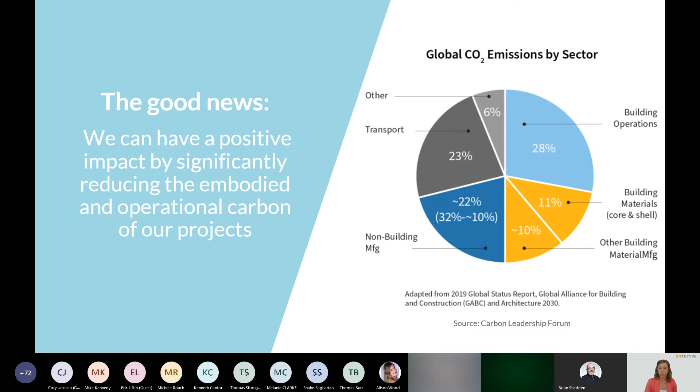In the graph on the right, you can see buildings account for almost 40% of global greenhouse gases, 28% of which are operational, accounting for carbon emissions associated with building energy consumption, and 11% are embodied, measured as global warming potential, which accounts for carbon emissions associated with the manufacture, transport, and installation of construction materials. However, the portion associated with operational carbon is expected to significantly decrease in coming years as buildings continue to have better operational performance, which means embodied carbon is going to start to occupy a much bigger piece of that pie.

As designers and professionals of the built environment, we want to know what we can and should be doing about this. The World Green Building Council's Bringing Embodied Carbon Upfront publication provides some fantastic guidance on required actions for all stakeholders involved. As you can see in the graph, to have the most impact on reducing carbon, of course the best option would be to build nothing and instead look for suitable alternatives. But if building is required, the next best would be to explore options for reusing existing structures and materials wherever possible. Then when designing, optimize as much as possible to reduce new materials and use low carbon materials — and that's where we're going to be focusing today.

One design approach for reducing embodied carbon would be through optimized material selection, with some examples there on the left. Another option would be to make more informed design decisions that result in reducing material quantities. With all of these things in mind, and knowing that the biggest opportunities for carbon reductions take place in the earliest stages of design, we wanted to develop a tool that would help us quickly and efficiently quantify those materials in concept design before a Revit model is even started.

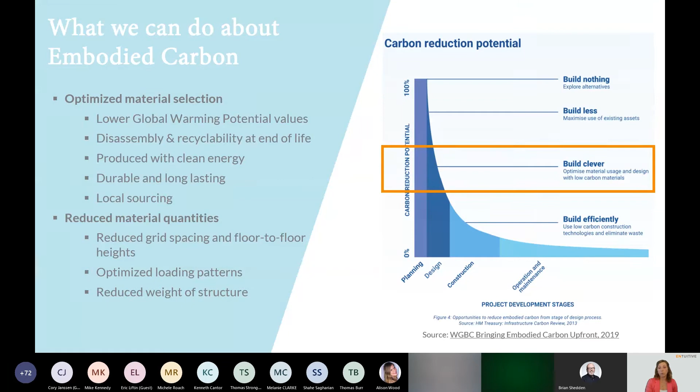With that information, we could then apply the global warming potential, which is the embodied carbon, of those materials and arrive at an estimated embodied carbon for the building or structure, from which we can then make informed design decisions going forward. Enter Entuitive's CARBEN Tool. This is a parametric tool that uses Rhino and Grasshopper, and the tool was developed around 3 key goals.

So first, it has to be easy to use for collaboration in client and design team meetings, and it has to generate results quickly. It has to calculate material quantities and the embodied carbon of both the structure and the building envelope. And finally, it has to complete concept level design checks to ensure that the generated structure is valid. And we can use this tool to analyze concrete, steel, or timber structures.

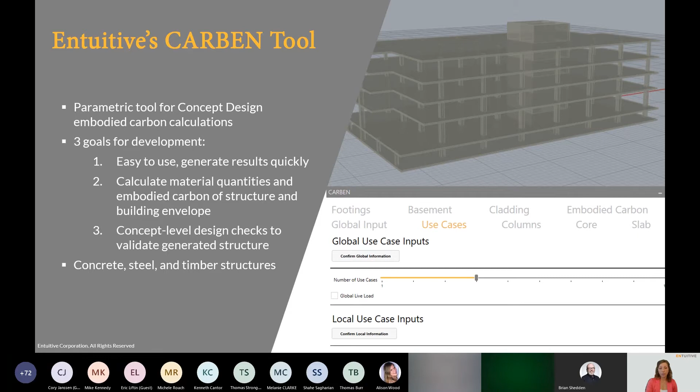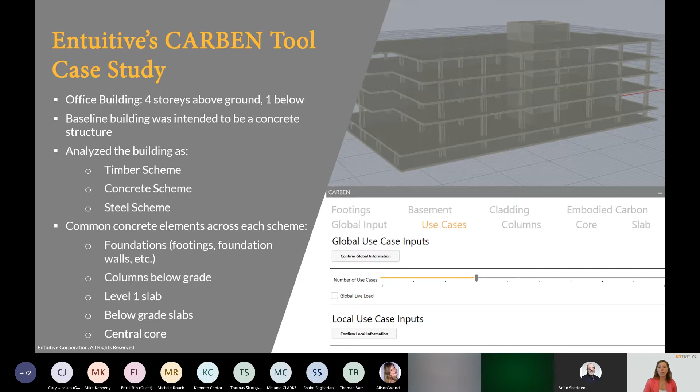So I'm going to take you through a quick case study of a 4-story commercial building to show you the functionality of the tool. This building was originally intended to be a concrete structure, which we're considering as the baseline. We wanted to evaluate the building from a timber and steel perspective as well. Each scheme does have some common concrete elements, such as foundations, columns below grade, level 1 slab, and below grade slabs, and the central core.

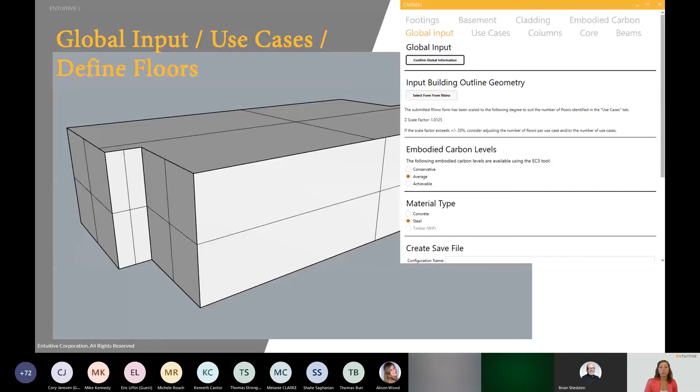So to start, we create or import an architectural form from Rhino and define the structural material type - concrete, steel, or timber. Then we can select a set of unique use cases to define the loading, the floor height, and the number of floors per use case.

Next, we define the column shape, the spacing, and the layout, and the column size or strength of the material is automatically designed in the program.

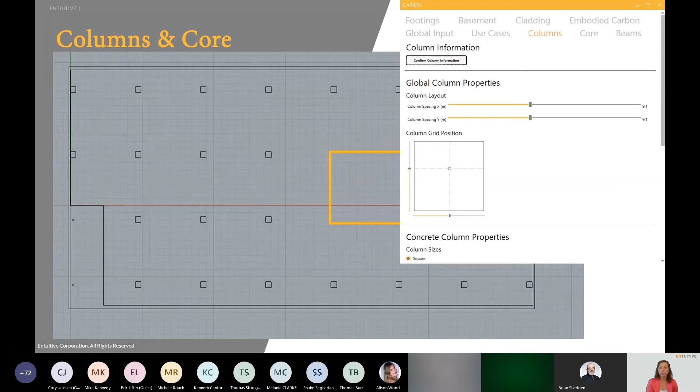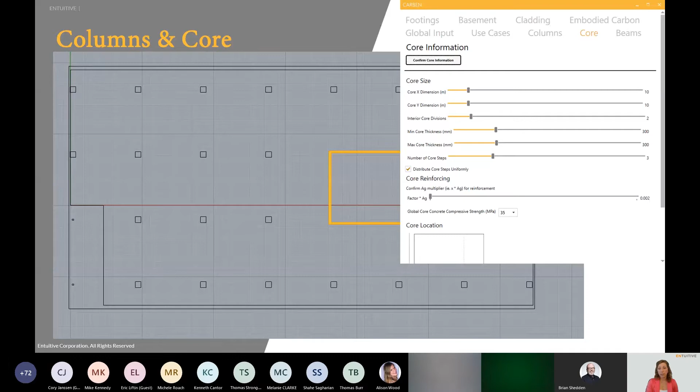We also define and place a central rectangular core, which removes columns as required. Other partitions can also be added, and all the wall thicknesses are defined.

Next, we define the beam parameters and spacing and define the deck parameters, and the framing is all automatically generated and the beams are all designed for strength.

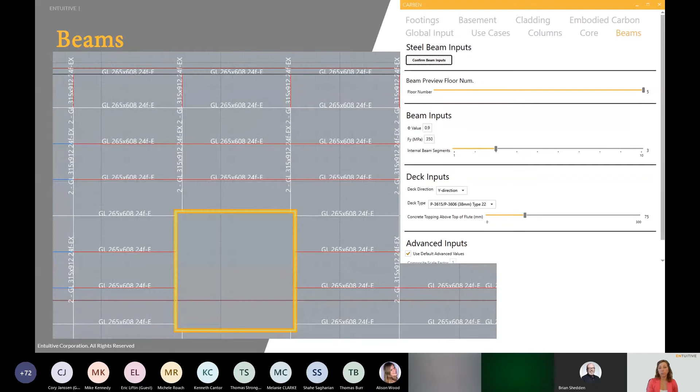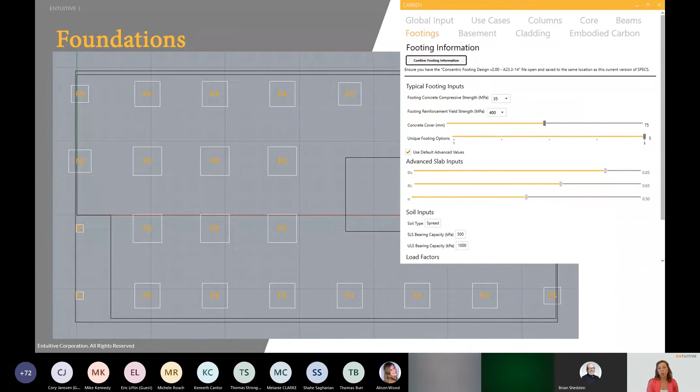And finally, for structure, we define the design parameters for the foundations. So currently we use a simple pad footing design, but we're in the works of adding other foundation options, including piles and raft slabs. Next, we add in the cladding options.

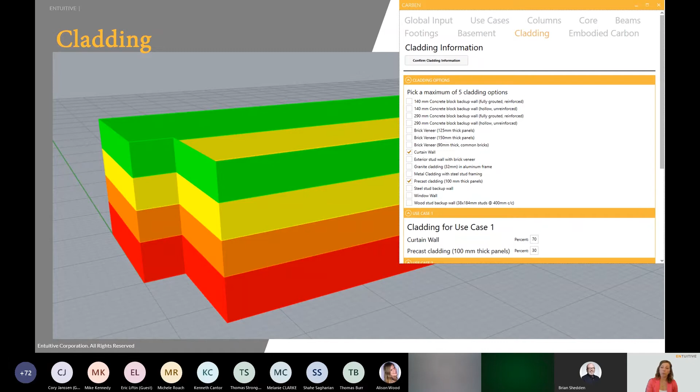These options can be defined per use case, and we can define the percentage of each cladding type per use case. Each cladding type will affect the loading and then the total embodied carbon.

Finally, we arrive at our embodied carbon estimates. The quantities of each material are tallied and the global warming potential of each material is applied. These results can be broken down by material type, element type, use case, or floor number. The embodied carbon values will update when the various design parameters are adjusted.

So for this case study, we compared the embodied carbon of each scheme. One commonality across all three schemes was that the slabs, unsurprisingly, had the most carbon. Remember, there was concrete that was common across all 3 schemes, and there was concrete in each of those schemes.

From that, we can then make some design decisions to reduce that amount of concrete where possible. We can also look for ways to reduce the embodied carbon of the concrete by increasing SCMs, using Portland limestone cement, or other innovating technologies to reduce cement content.

These graphs show the embodied carbon as a percentage of the total for each scheme. When compared to baseline, the timber scheme had a 31% reduction in embodied carbon, and the steel scheme had a 24% reduction.

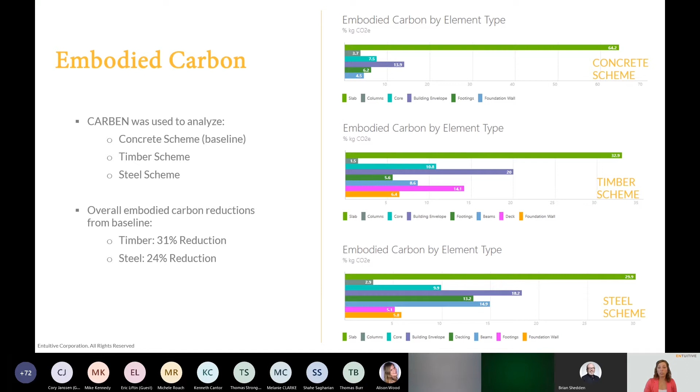So really the biggest benefit to using this tool is that it's really quick and agile, and it allows us to quantify multiple concept designs relatively quickly since all element sizing is automated, which is different from current tools that are out there where the user actually needs to determine the structural sizes.

This tool is constantly being improved and expanded, and some of our future plans include creating a hybrid superstructure option to find an optimal balance between timber, steel, and concrete elements. We want to continue adding to our EPD database of materials, and we are expanding the concrete scheme option since right now it just looks at flat plate. We also want to build more foundation options in addition to pad footings to include piles, caissons, raft slabs.

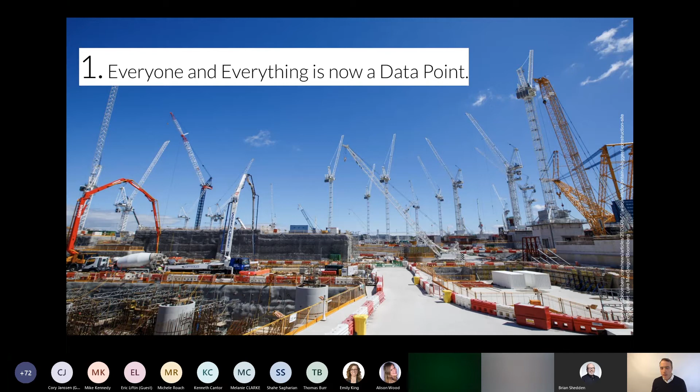What we have to understand is that every single thing on a project can be measured, tracked, and understood. An important trend is that the cost of this data acquisition over time is coming down significantly, and I think we're just starting to see that.

As everyone's moved from BlackBerries to cell phones, moreover now we're digitizing our projects at the early stages in a BIM environment and then connecting that to our systems.

A quick example: this is a Leica P50. These retail for about $150,000. You need $20,000 in software, a $10,000 computer, and an $80,000 paid individual to actually operate the system.

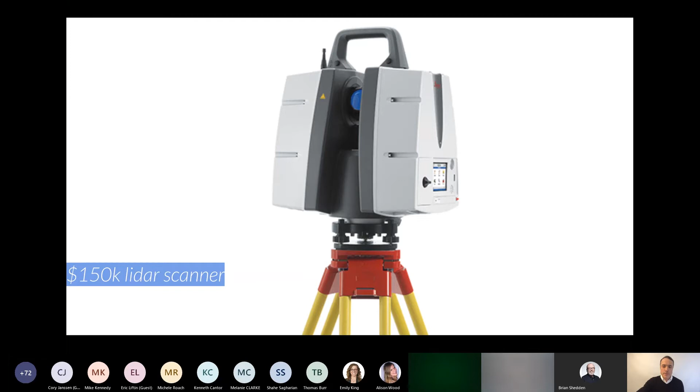This year Apple's going to release an iPhone with a LiDAR scanner built into it. So we're seeing major steps in simplifying how we're collecting data and making it easier to collect.

This is a UAV that Amazon's releasing this year for $250 — you can have a security camera that flies around your home. It's easy to see how these things can bridge to an active construction site and provide a lot of value for data collection.

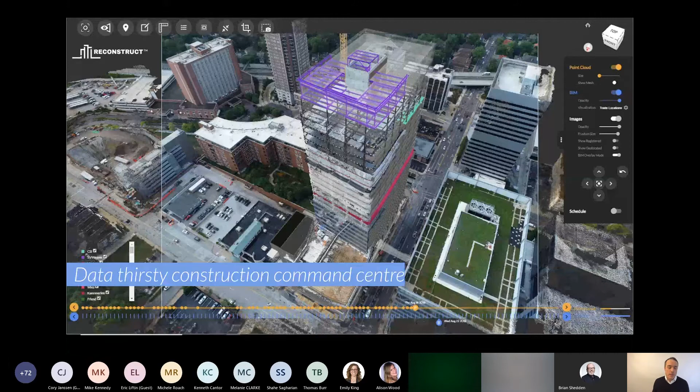And then there's a whole class of software technologies that integrate all this information into one place, giving the construction manager, or whoever's in charge of that job, total insight into all the real-time activities and data flowing on their project. This one's called Reconstruct.

The second major point I want to make is that your software knows you better than you know yourself, in that it's collecting data about everything you do, and it can actually process that data and give you recommendations better than you can do in a manual way.

Over time that's actually getting worse, as the people with these skills and experience are retiring out of the workforce, and our projects are getting more and more complicated.

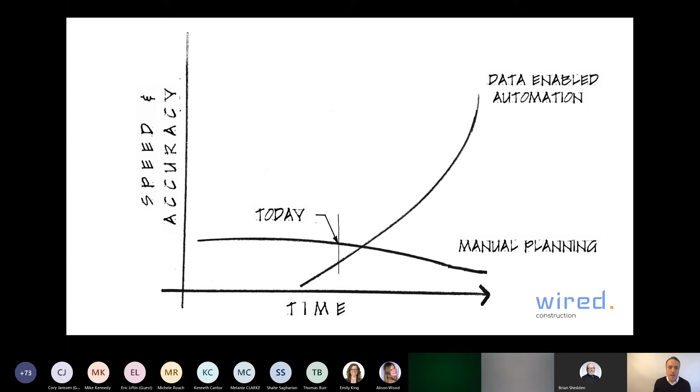I think what we're going to see very quickly is that data-enabled automation — the tools, the AI, and all these platforms — are going to accelerate way beyond what we're currently capable of using with our manual processes.

As an example, looking at the planning fallacy: this idea that we can think about a construction project as a cascade of activities. The reality of that is significantly different.

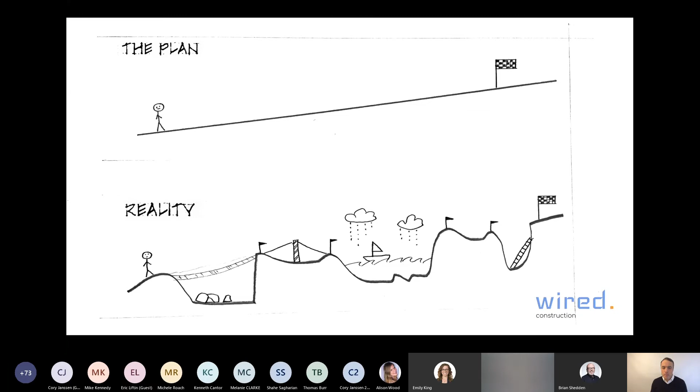On a project, you've got many moving parts, many variable factors, and all we can really do is project the best path forward, and then bob and weave as we go. So the big difference here is that the software, because it has access to our data in real time, can actually provide better recommendations than what we can develop for ourselves.

Just a few examples: there's a whole class of estimating tools that connect with our models. Now that we're generating 3D models of the building we're going to build, we can compare that against our historical productivity rates and unit costs, and the system will spit out a pretty decent estimate almost instantly. The challenge is that, as a GC, you're using someone else's platform and formula, and potentially someone else's database of unit costs.

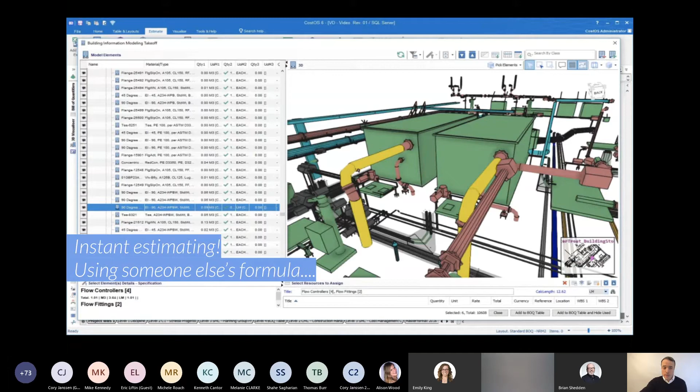The same thing is happening in design, where we see generative design now being used on a regular basis to solve for design. The challenge again is that you can set the parameters, but you're using someone else's platform and someone else's design algorithm. So it's really changing the nature of what you provide as a service.

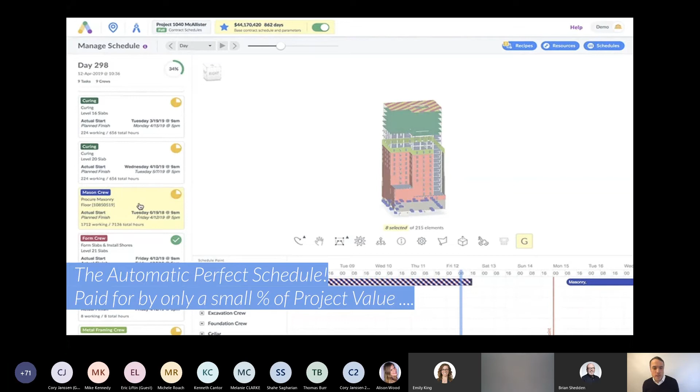We're seeing that generative design concept now being applied to scheduling, where with a 3D model, your productivity rates, and the recipes of how the sequence of events needs to occur on a job, you can pay a small percentage of your project value and have an AI generate millions of different scheduling scenarios, allowing you to pick the most optimal sequence of events for your project.

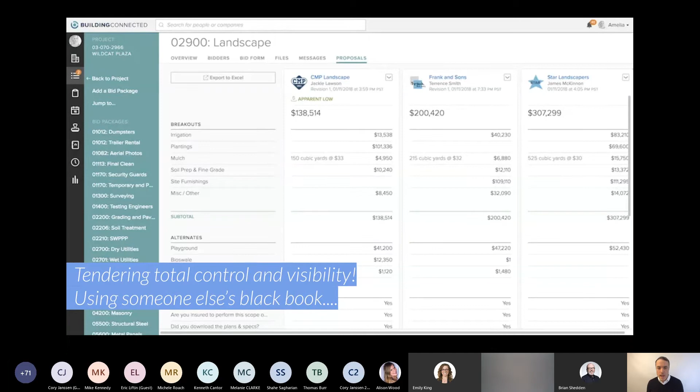Some examples of this: Autodesk purchased Building Connected a couple of years ago for about $600 million, somewhere in that range—probably have that wrong, but a significant amount of money. It's a fantastic tool for tendering. A general contractor can now tender with total control and visibility, managing all those transactional discussions with their supply chain. Unfortunately, you're doing that on someone else's platform, potentially with someone else's black book. So you could see how that can lead to Uberization.

The beauty of using systems like this is that your historical information is cataloged and organized for your use. But again, if you're storing information in the cloud on someone else's product, you're storing your data on someone else's computer—and supply chain management system. Jovix is an example, a huge platform.

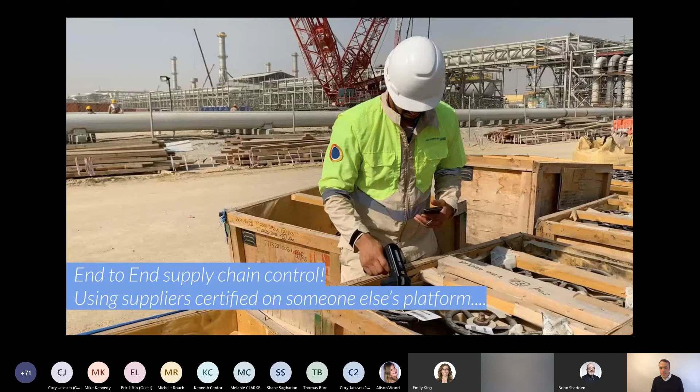What they do—you invite them into your project—they'll go out and certify your suppliers. They'll set up Wi-Fi beacons all over the factory and put an RFID tag on every single element being fabricated. Now you have total visibility in your supply chain from fabrication through delivery onto the job site, and all the points where you need to check for quality. Unfortunately, again, you're doing this on someone else's platform, and you're certifying them on that platform.

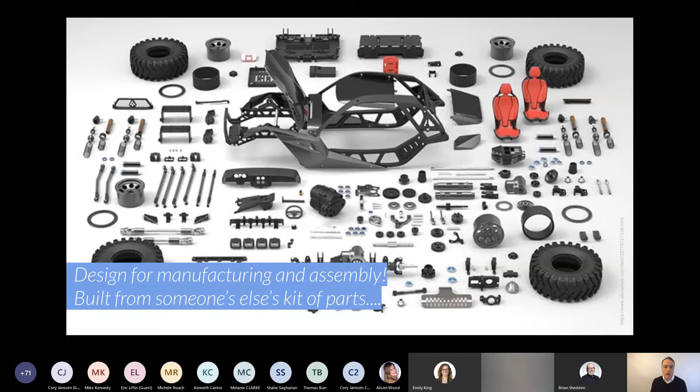Every time you give away some of this responsibility, you're giving away a bit of the service you used to provide. This is an example from Alibaba where you can order a kit of parts and assemble a vehicle. This is very applicable to our world now, where we're designing for manufacturing and assembly—we want to reform our supply chain, buying elements that assemble on the job site, which greatly simplifies design, procurement, and construction. However, you're creating an environment where you're building using someone else's kit of parts or their intellectual property. So those are my three major points.

So it's not all murky and dark. I do think that general contractors definitely have a place, and they're going to continue to have a place. But I think there's a real need to think about the technology you're introducing into your technology stack for your business, and think about the data that you're giving away.

And as you procure those systems, you need to think carefully about those relationships that you're developing, making sure that you have interoperability, making sure that you can extract the data, and making sure that the culture that you're creating within your business as you digitize your work and inject these systems into your business, you need to be able to be prepared to move and turn on a dime and replace those systems with other systems as required in your technology stack. So that's my quick six minutes, but I'm looking forward to the discussion.

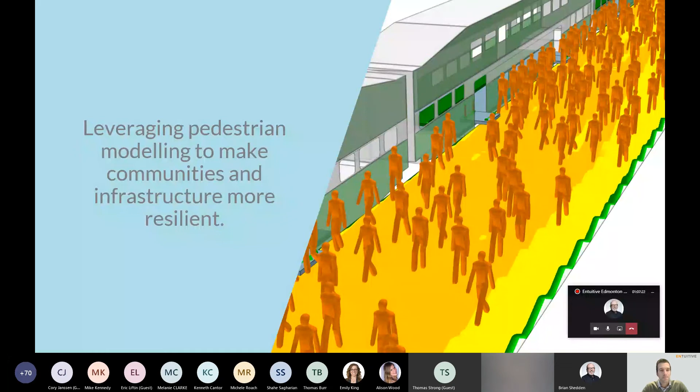So what is pedestrian modeling? It's the analysis of how people move within our built environment, and we do this to quantify movement patterns, travel times, or areas of crowding and queuing. The animation you see on the right is one of the large transit projects we worked on, and this in many ways is one of the typical uses for pedestrian modeling. It's any type of building or infrastructure with large volumes of people where we want to model those people and make sure how they move through that space is comfortable and safe.

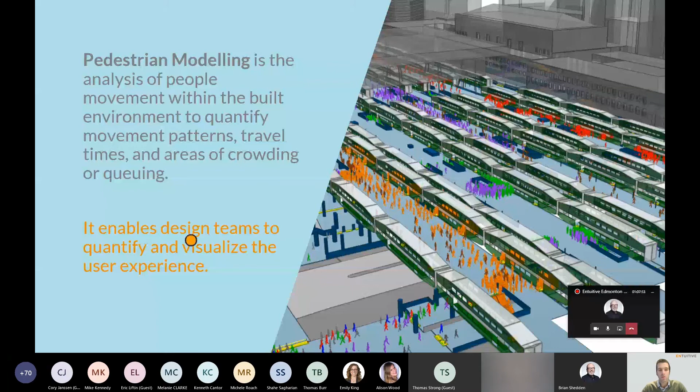Essentially what it allows us to do is, as the design team, quantify and visualize the user experience. In terms of quantifying that, some of the traditional metrics we've seen in the past, first and foremost, is density. You may have heard this referred to as level of service. When we model a space, we're looking at how dense the people are in a given area. The more dense they are, the slower they're moving and the less likely they are to actually take their desired path. So the greater the density, the lower the level of service.

We can also look at travel time. So how long does it take someone to get from point A to point B, and what does that look like on average for all of the occupants? We can look at processing times. So if you look at an event center, for example, how long does it take you on average to get from the gate to your seat? For an airport, we might look at how long does it take you to get from curbside to your final gate. So any sort of processing time that we want to look at.

We can look at evacuation time as well. So in the event of a fire, how long does it take people on average to evacuate, and what is the worst case evacuation time, and is that still safe? And then we can look at construction sequencing. So as we introduce different layouts of hoarding, or as we open and close different areas of the building or the infrastructure, what is the impact on how people move through that space? So these are the traditional metrics that we would have seen in the past.

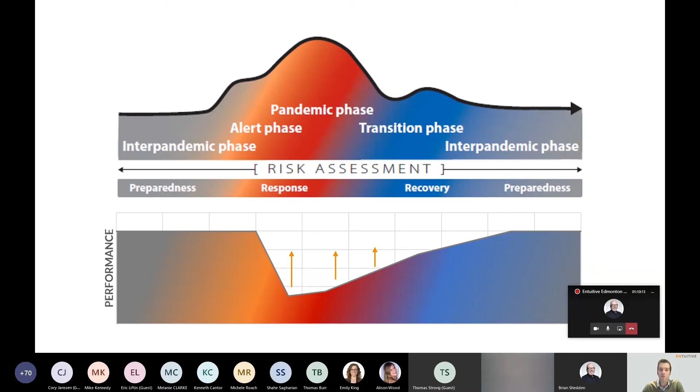I mentioned the traditional metrics, and what we've seen through COVID is we do have new opportunities. These are things we've seen in the news about how people are responding to the pandemic to get back to work or to get people back on transit, different mitigation measures to lower the risk of transmission. What we've seen is certainly physical distancing.

In the context of pedestrian modeling, we call this proximity analysis. We can also look at how long people were within close proximity. They might violate that 2-meter recommendation, but for how long are they doing this? And we can also look at for how long people are within a certain area.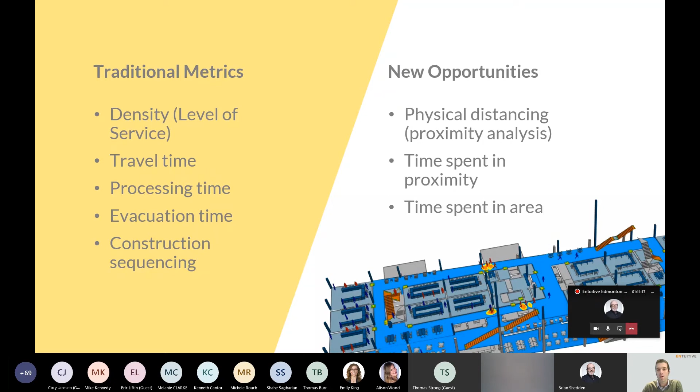With this model we can actually test our mitigation measures and see if they have lowered any of these metrics, if they have allowed people to maintain physical distancing, if they have lowered the time spent in proximity, and if they have lowered the time spent in high-risk areas. Essentially, what we want to do is use pedestrian modeling to test, compare, and quantify the effectiveness of different mitigation measures for a range of scenarios.

Right now we're looking at this in the context of COVID, but even before this, pedestrian modeling was used for a range of scenarios. If we think of fire, for example, and look at evacuation modeling, what we're doing is modeling a building in a fire scenario to figure out how effective our egress strategy is, and whether there are things we can do as a design team to improve that evacuation.

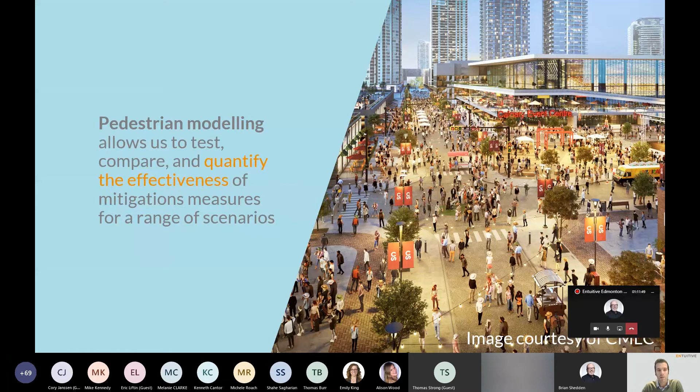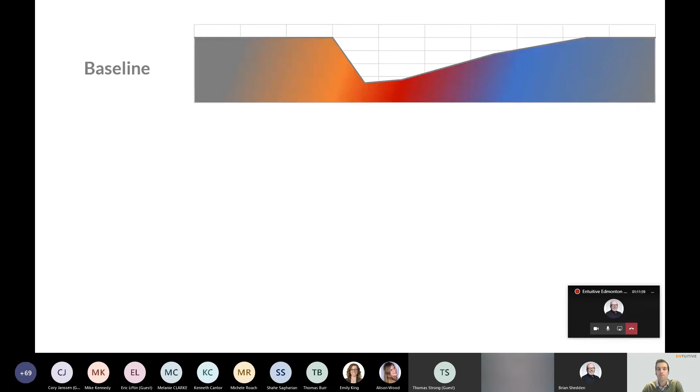If we're using pedestrian modeling to test different mitigation measures, how we might think of that related to resilience is if we think of this baseline curve, the performance curve. We have an initial drop in performance when a given event happens. We could have one scenario where through modeling and other mitigation measures we can reduce the initial impact of that, so we don't have such a drop in performance, but we might have the same recovery phase afterwards.

An example of this for pedestrian modeling might be an event center, where if we proactively have mitigation measures such that we don't drop to 0 occupants, but we might have 25% of our attendance, then we don't have such a big drop in performance. We still have some operation happening when that event occurs.

Another scenario we might think of is an improved recovery. This might be transit, for example, where an event happens, we have this immediate drop in performance related to a lot of external factors. If nobody has anywhere to go, we're going to have this immediate drop in performance of the transit systems. But if we can use pedestrian modeling to demonstrate how we've mitigated that risk of transmission, we restore public confidence in using that transit, then we might see a much quicker recovery until we're back to 100% performance.

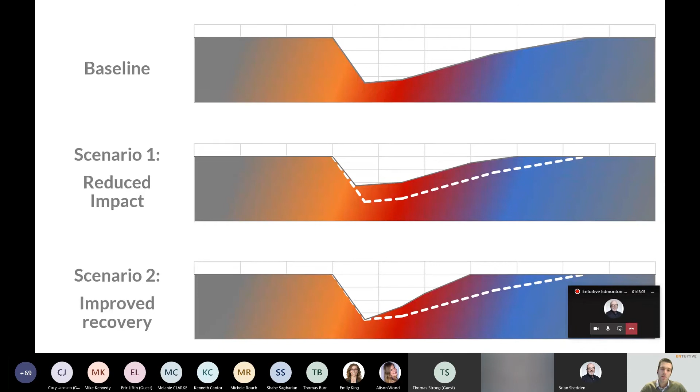And so these are different scenarios we can think of where we can leverage pedestrian modeling to inform our mitigation measures ahead of time, such that we don't have such a drop in performance, or we have a quicker recovery for a given event.

So to wrap up, what I would say is that COVID-19 has certainly placed a greater awareness on how people use and interact with their built environment. We've already seen this in RFPs. One of the biggest pedestrian modeling jobs we have in the office right now, the RFP actually asked how will the design team respond to COVID and how will they respond to future pandemics? One of the things we put forward as a differentiator was that we're going to use pedestrian modeling to actually test our mitigation measures ahead of time, to make sure they are effective and that we are able to respond to this should it happen again.

So all to say, we as a design community must respond to these new expectations. There are new expectations of how people will move through our spaces and how they interact with them. And we do have the tools to be able to respond to this, both for new buildings and for existing buildings.

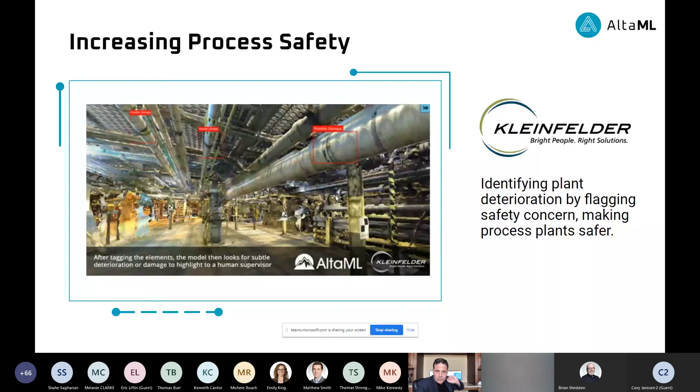Another example, a little adjacent to construction or engineering, but we've done this in a number of different areas. A previous speaker talked about the 55 or 60-year-old person leaving the industry. We see that happening all over, and we can use predictive models to try to identify the operators who are actually able to perform that task in the best way. This can be used to help train those people in terms of how they can improve, or it can serve as a tool to help guide them through the process. We've done that with site superintendents, operators on wireline wells, and a number of different areas.

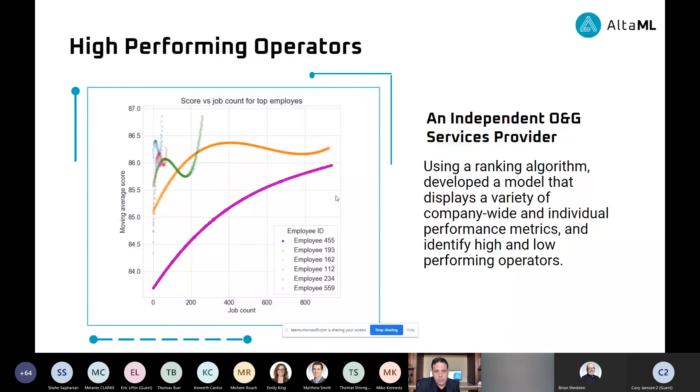Another project we worked on was win prediction in terms of RFPs with an engineering firm. This isn't going to work on the Stantec Tower or the big projects, but when you have high volume projects or a high volume of bids with a lot of data, we've been able to show that we can predict the likelihood of an RFP in certain areas. It's the first step towards being able to optimize for price.

Last example, we've done this both with large general contractors as well as utilities, again back on safety. Being able to take a look at those reams of safety data we have on site, once digitized, we can use those to have predictive models for what type of projects our workers are most at risk with.

So I ran through those really quickly. I know we're running a little over here, right at the top of the hour. My hope is that this quick spin through some projects we've worked on might show some inspiration in terms of your work, and where AI isn't just happening in the future, but is actually taking effect in projects today. Thanks.